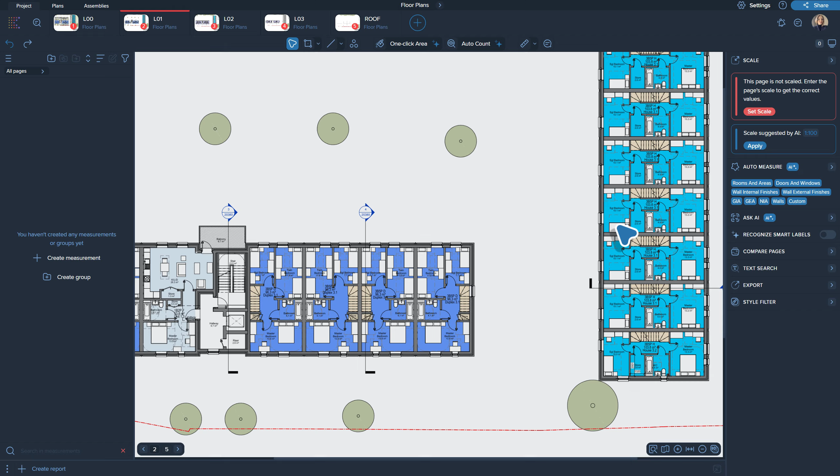For instance, on this floor plan, you can see that different rooms and areas are highlighted with several distinct colors. To get started, I'll use our Auto Measure tool.

First, it's essential to set the correct scale for the drawing. I'll apply the scale, and now I'll run the Rooms and Areas command. The AI immediately begins to process the drawing, and within seconds, it generates all the room measurements.

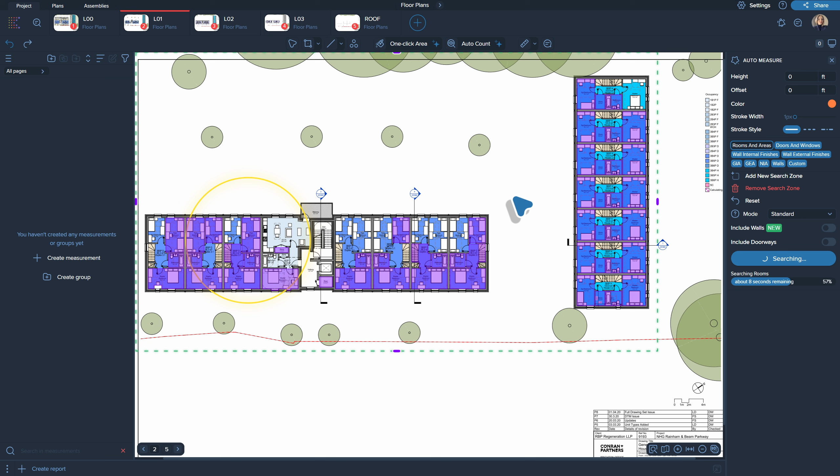Next, the system automatically begins to identify and label the spaces. I'll pause that process for now to demonstrate two methods for classifying these measurements.

To make the new measurement overlay stand out more clearly, I'm going to adjust the drawing's visibility to increase the contrast. I'll do this by going into the settings, enabling night mode and black and white, and then reducing the opacity of the original drawing layer.

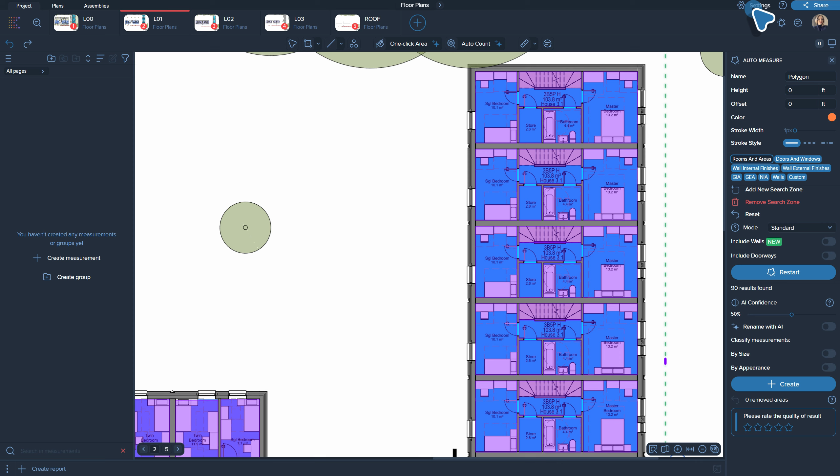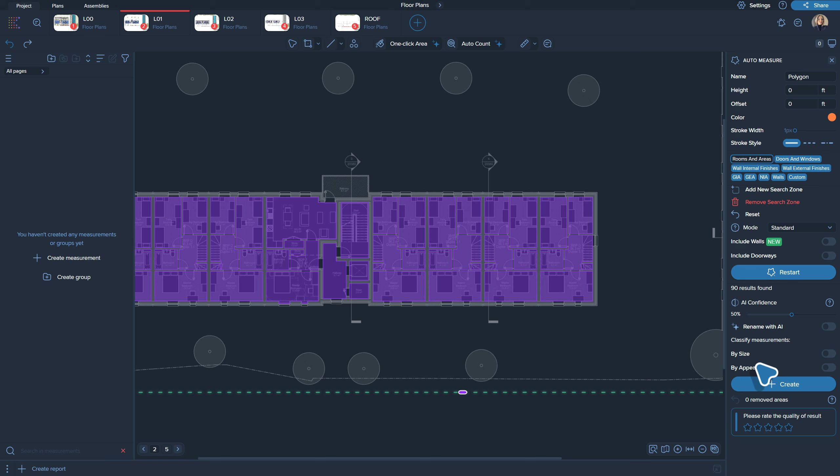All right, with the measurements generated, we can now classify them. The first method under Classify Measurements is by size. When I select this, the tool automatically groups and color codes the rooms based on their square footage. As you can see, it has created several distinct size-based groups.

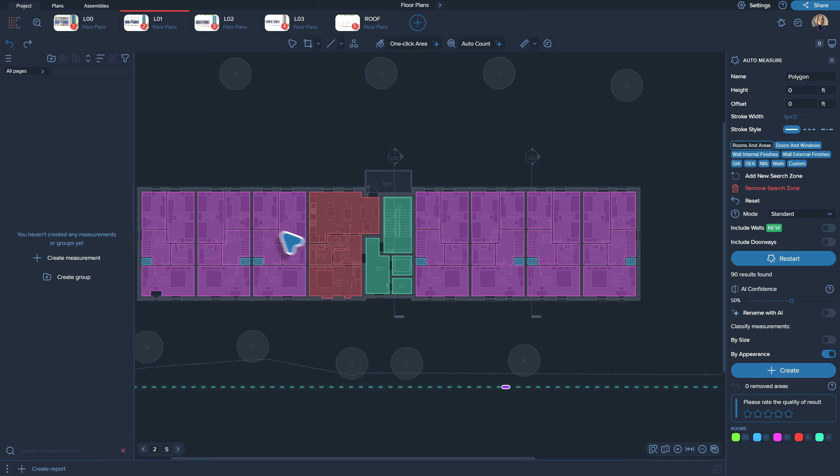The second, more innovative method is classifying by appearance. This is where the feature really shines. You'll notice how the rooms were originally drawn with different fill colors. The by appearance function has intelligently detected these colors and automatically grouped the measurements to match. This allows you to instantly classify spaces based on the visual information already present in your plans.